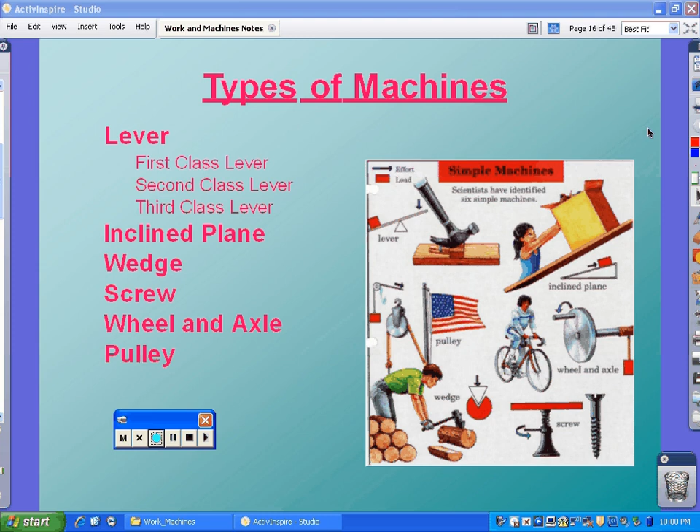Levers. Levers are the most complicated of the simple machines to figure out, mainly because there's three different classes of them. A lever consists of a bar that moves or pivots at a fixed place, and this fixed place is called the fulcrum. The three things that change are the force, the fulcrum, and the load. All three of these are in every single class of lever, but the position of each is different.

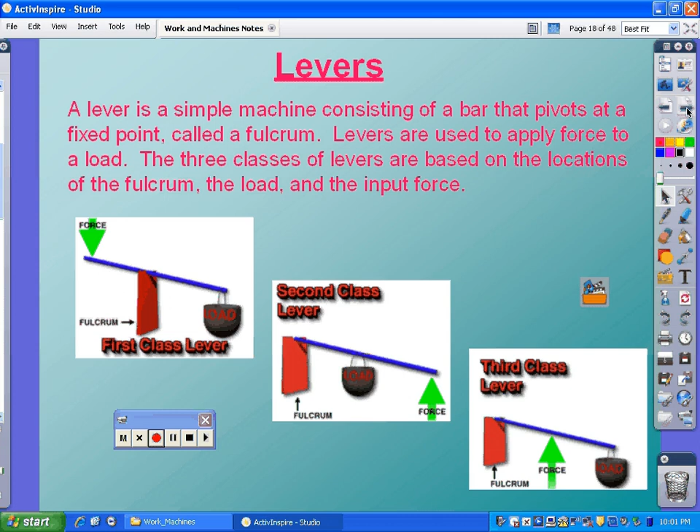So let's identify. First class levers are the very traditional seesaw-looking lever. Scissors are a good example of a first class lever. It's technically a compound machine because it's a wedge and a lever. Crowbars when you use them to pull the nails out. A paddle in a canoe is a good example of a first class lever.

The fulcrum's in the middle, load on the end. You put the force on the other end over here, and the closer you move this fulcrum to the load, the less force you'll have to put on it. Why? Because you've got more distance in between the fulcrum and the force.

Second class lever, you have force on the end, load is in the middle, and the fulcrum's at the very end, the pivot point. A wheelbarrow is a good example. You have force on the handles, the load is in the bucket, and the fulcrum is the wheel. Yet another compound machine because it's also a wheel and axle. A bottle opener is a good example. A crowbar is a good example of a second class lever. Force goes here, load goes on the metal part here, and then the fulcrum is the curved part.

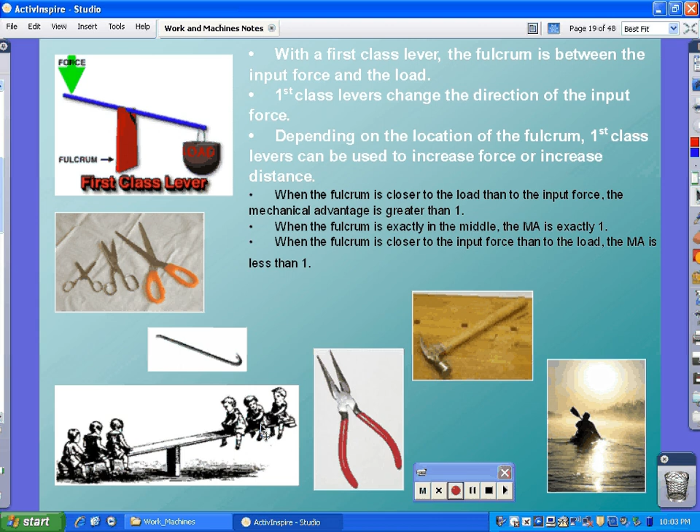Let's just go back to levers real quick. I generally find it easier to figure out levers by thinking about them in terms of examples. First class lever, I think scissors. I think seesaw. Second class lever, I always think of a wheelbarrow. Force on the end, load goes in the bucket itself, so that's in the middle, and the fulcrum is the wheel. I think this just makes so much sense. Force, load, fulcrum.

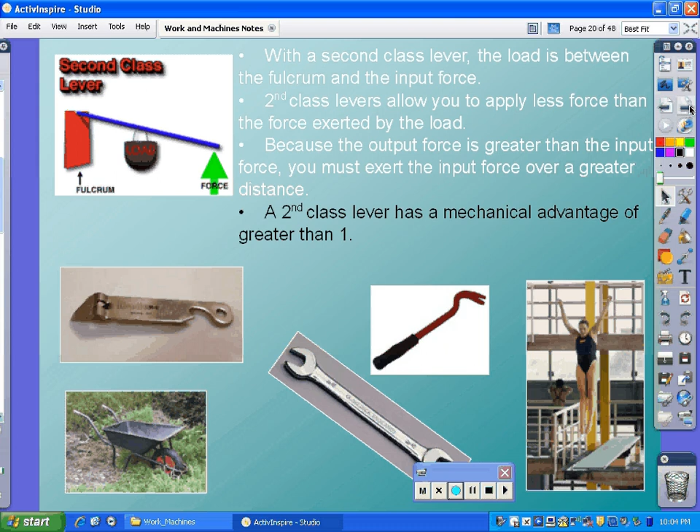Third class lever, I just think of tweezers. Tweezers are a good example. Salad tongs are another good example, right? You put the force in the middle of the salad tongs, the fulcrum is up here, and then the load or the work being done is down there at the end. So examples are the key to remembering levers.

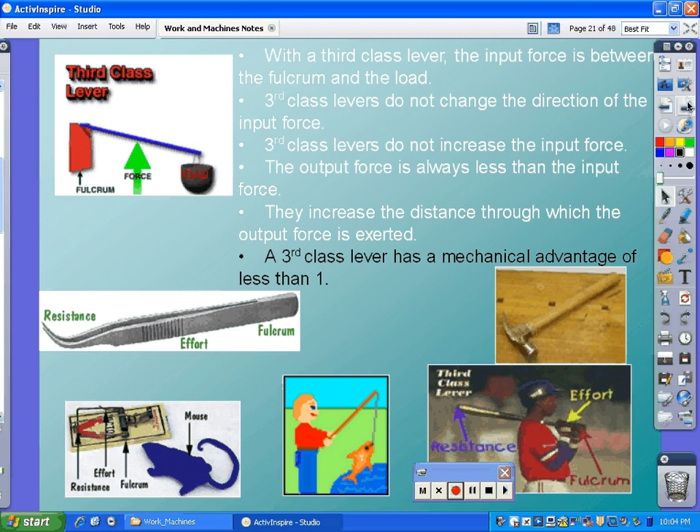Inclined plane. It's basically a straight slanted surface. It doesn't have to be flat. It's oftentimes referred to as a wheelchair ramp kind of thing, or like the ramps going into the back of a truck for a four-wheeler, but it does not have to be flat. It just has to be a slanted surface. And stairs are always a really good example of an inclined plane.

They basically generate a smaller force over a greater distance. For instance, you could pick up the scooter here, but it'd take a lot of force to do that, and you wouldn't have very much distance to do it over. A ramp allows the work to be done over a greater distance, which really just reduces the force. Anytime the distance increases, the force reduces. They are opposite to each other. Lots of good inclined planes in your day-to-day life: dump truck, stairs, wheelchair ramp.

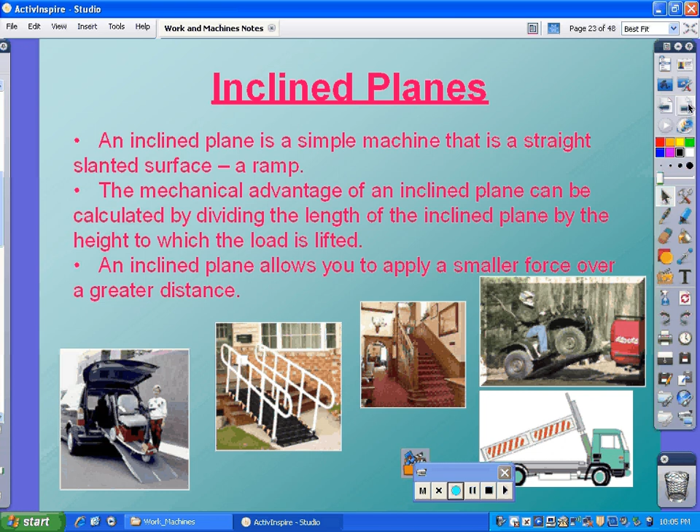Wedge. A wedge is also an inclined plane. It's technically a double inclined plane that moves, right? You have two things slanting towards each other that make a point. It doesn't necessarily have to be a point, but an axe is a great example of a wedge.

Chisel's a good example. The plow. This is a little wedge underneath the door. I would really think this is more of an incline plane, but it technically is a wedge used this way. Knives are wedges. Nails are wedges. Sharp point, it drives itself in between something, right? Saws are wedges.

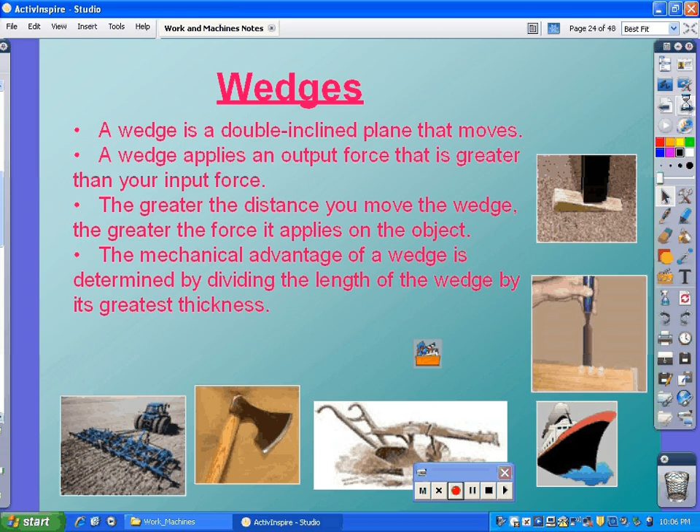It is definitely a screw. It's still an incline plane that goes around in a spiral. The spiral just goes around a fixed point. Screws are stronger. They will do more work on something than a nail will, because it applies a small force over a long distance. So every time it turns, it's incline planing. So it's basically a super nail if you think about it, because a nail is a wedge, which again is also an incline plane.

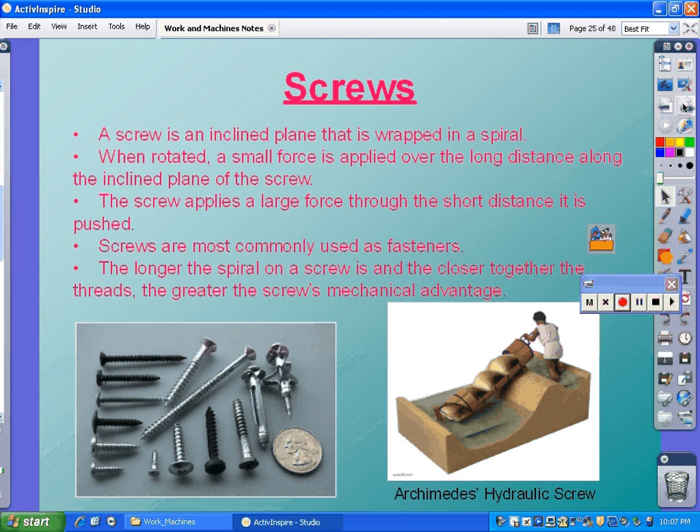Roller coasters often use screws. I mean, riding around in a circle is very, very fun, and this kind of thing does not have to be a thing you put in with a screwdriver. That's oftentimes a misconception. If you remember the OK Go video that I showed, the really cool music video, they had several bowling balls going around a radius, which in fact is a screw.

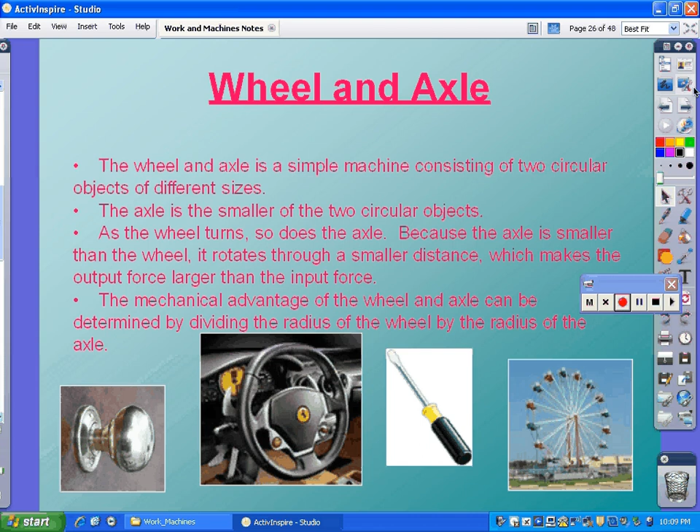Okay, onto the pulley. Like I was saying a minute ago, it looks similar to a wheel and axle, but it's not necessarily a wheel and axle at all, because it's really a wheel. I'll give you that, but there's no axle, and that's what makes the wheel and axle different than the pulley. Simple machine consisting of a grooved wheel that holds a cable or a rope or some kind of thing. Two different types. You have fixed and movable.

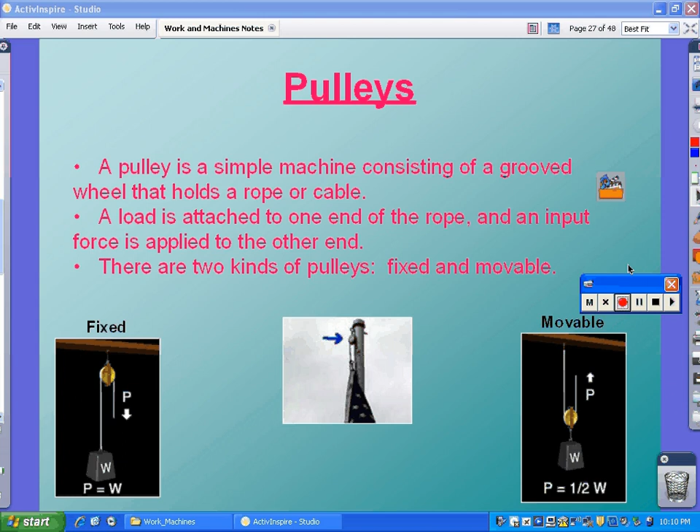Fixed pulleys. They do not give you mechanical advantage, which means that it doesn't make work easier. What it really does, it changes the direction of the work. You pull down, something goes up. A good example of this in your everyday life are mini blinds. You pull the string down for the mini blinds, and the mini blinds go up. It does not make the work easier. It just changes the direction. So in that sense, I guess it makes it easier, but it doesn't make it force-wise easier.

Flagpole is a good example of this one too. Raise the flag up that way. It just makes it more advantageous or easier to do on a daily basis, I guess. Movable pulleys do make work easier as far as the force required.

It definitely is going to distribute it over more distance, which, as a result of more distance, means less force. So it's definitely mechanically advantageous, which means it just does more work with less force.

You have the combination movable and fixed, which work in a system called a block and tackle. You see this a lot on sailboats. You also see it in places that have to lift heavy things like car engines or something like that. So it has great mechanical advantage. Why again does it have great mechanical advantage? Because it increases the amount of distance that the machine does, right?

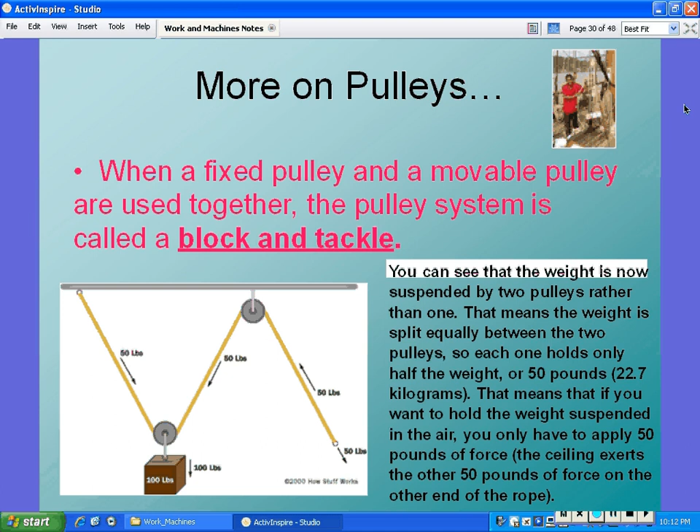Work is equal to force times distance, if you recall. And if you increase the distance, then the force decreases. So that's exactly why block and tackle works so well for heavy things. It increases the distance, thereby reducing the force, thereby making it easier for you to move something. You can pick up an entire engine out of a car with a block and tackle.

Again, I'm not going to sit here and read over these. You can pause the video and look at them again if you want to.

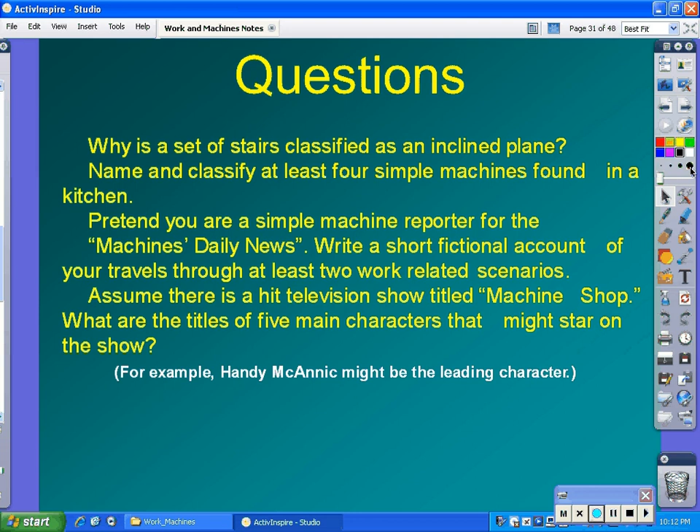Compound machines. This is brief. Compound machines are two or more simple machines. Oftentimes things are compound machines. Scissors are a good example. Scissors are wedges and a first-class lever. A can opener is a compound machine. It's a wheel and axle. It's a third-class lever. It's a wedge because it cuts.

It's a good example. Stapler, second-class lever, right? Fulcrum's here, right? Force goes here, and the load goes here. The work being done is here. It's definitely a second-class lever. But additionally, the second thing that makes it a compound machine is the staples. The staples are wedges, cut through the paper.

Here you see a block and tackle. Multiple pulleys, and by definition, if it's more than one pulley, it's more than one simple machine, therefore making it a compound machine. Pencil sharpener, a good one. Wheel and axle, wedges to cut it. Wedges are actually cut in an inclined plane or a screw. This is a pretty compound machine. It's a pretty ingenious invention that people just take for granted on a day-to-day basis.

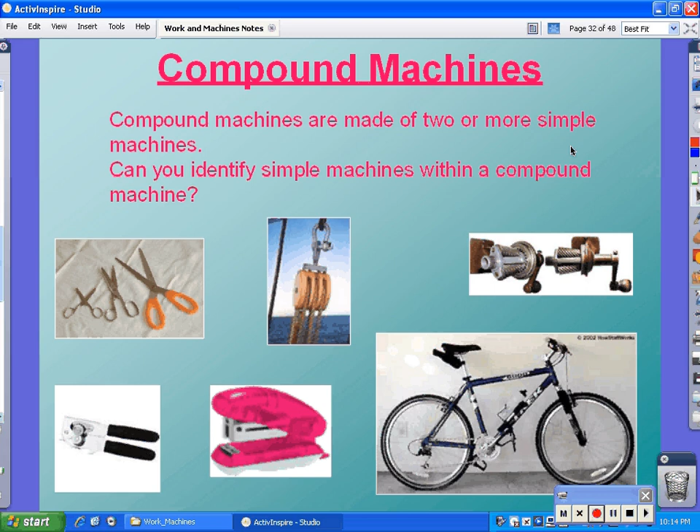Bicycle's got a lot going on with it, mostly in the gears and wheels, right? Obviously a wheel and axle here, wheel and axle here. And the gears themselves are wheel and axles. Could technically be considered a pulley. I'll leave this up here in case you were questioning what some of these compound machines were.

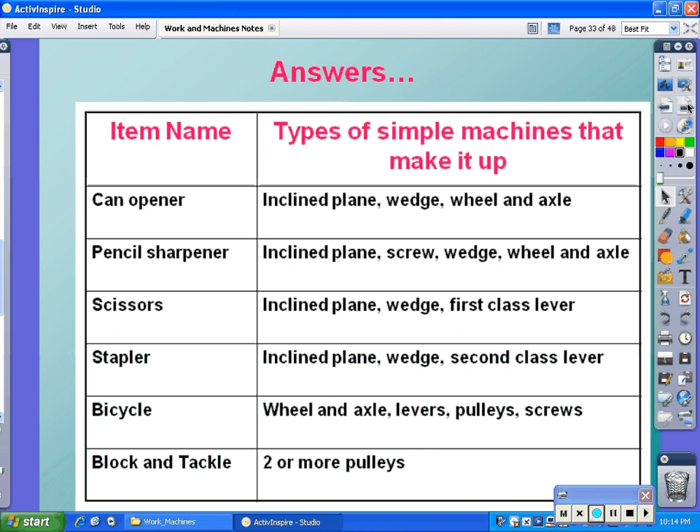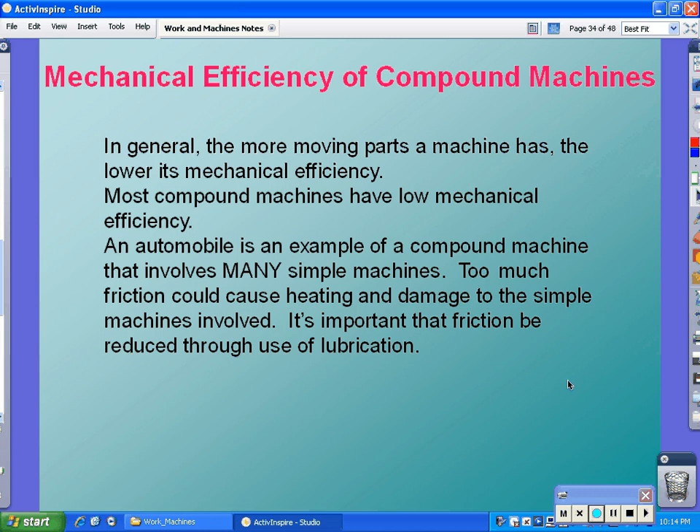Machines become less efficient as compound machines because friction goes up. Remember, efficiency has to do with friction. Friction goes up with compound machines because there's multiple moving parts. And the more moving parts you have, they have more opposition to motion, which is friction. So you typically have to lubricate compound machines to make them work effectively to reduce the friction.

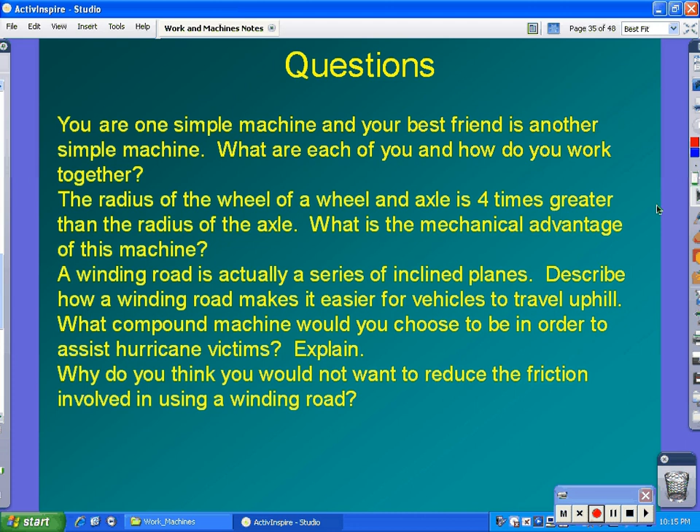I'll pause it here. Some of these are kind of a little bit difficult. This is really a high school presentation.

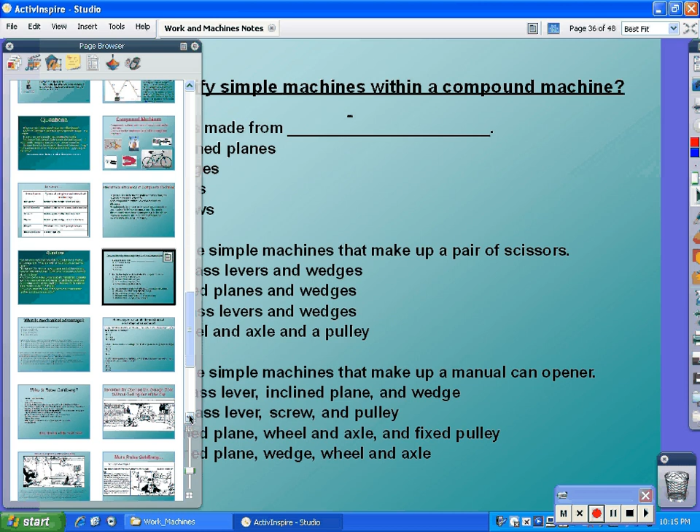Last thing I'll talk about is a Rube Goldberg machine, briefly. If you saw the videos from Pee-wee's Breakfast Machine and the OK Go video and this kind of thing, you saw some good examples of Rube Goldbergs. Rube Goldberg was a guy who drew cartoons of these complicated devices. And the only reason it's relevant is Rube Goldbergs are all full of tons and tons of simple machines, levers and pulleys and wheel axles and everything.

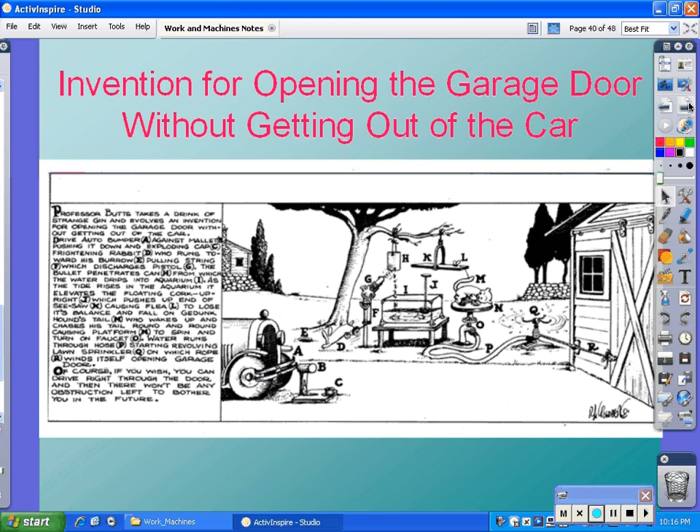You can see them here, right? Wheel axle, lever. This is a lever when it hits down here. This is a wheel axle, right? So anyway, not going to harp on it. I just think in case it popped up on a question, you should be aware of what the significance of a Rube Goldberg machine is. And it's really just that it illustrates a lot of simple machines in a funny, kind of interesting, scientifically goofy way.

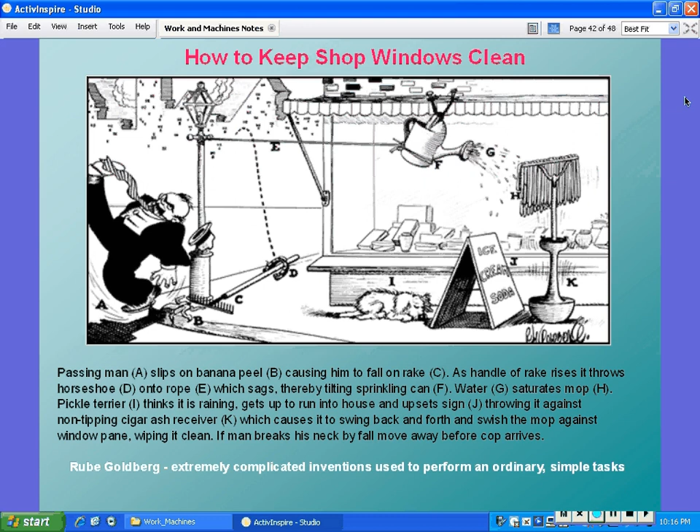And look for those simple machines. If you're going to watch the video, don't just watch the video and enjoy it. I want you to enjoy it, obviously, but look for the simple machines. Identify them. Call them out. It's okay. It's okay to learn and have fun at the same time. It technically is not illegal.